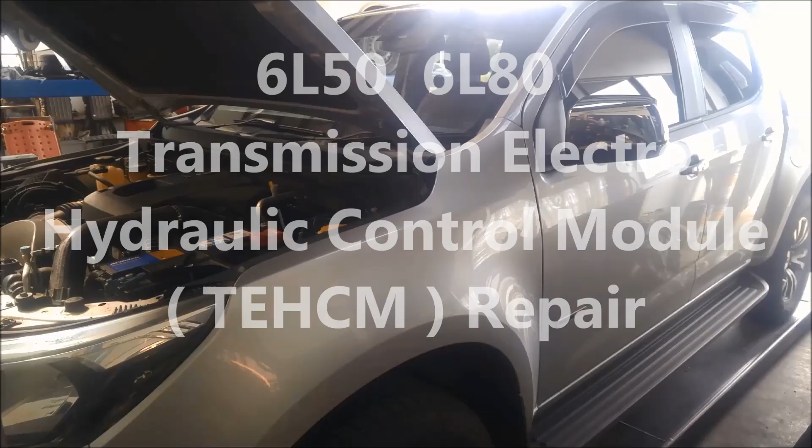G'day. Today we're doing a repair on a Holden Colorado 2.8 litre turbo diesel, and it's got the 6-speed transmission in it. 170,000 on it. And what's happening, the shift between third and fourth, there's a bit of a shudder. Also the torque converter clutch is pulsing, especially when it warms up. You'll see the tacho revs just moving up and down slightly.

So we've had the scan tool on there. We couldn't really get any transmission codes or engine codes out of it. So what we're suspecting is the transmission electro-hydraulic control module. What that means is there's a little plate on the valve body that has little switches on it,

and sometimes those switches get damaged, the rubber seals flatten out, lose pressure, or the little discs wear out, and they can get contaminated with fine metallic debris if they haven't been serviced for a while. This one, we believe, has never been serviced in 170,000 kilometres.

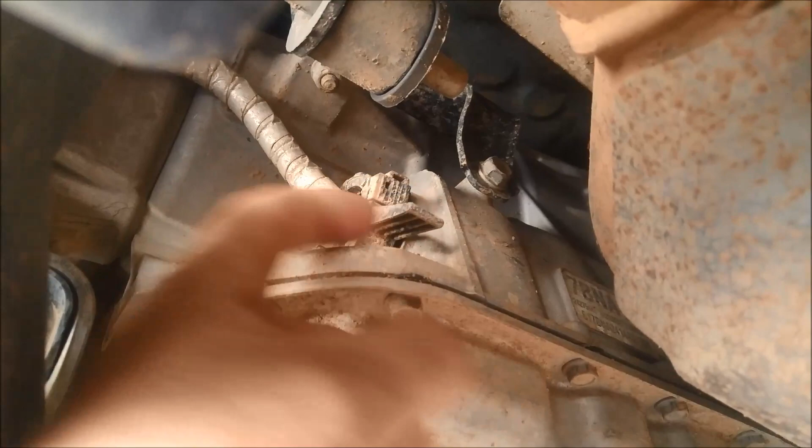Now the 6L50, 6L80, 6L45 as well, same family of transmission. They've got a little sleeve here that links the external electronics or cable to the mechatronics in the transmission. So we're going to remove all that. Make sure you clean that as best as you can, and also any other loose dirt around there. It'll just be a lot more pleasant to work on.

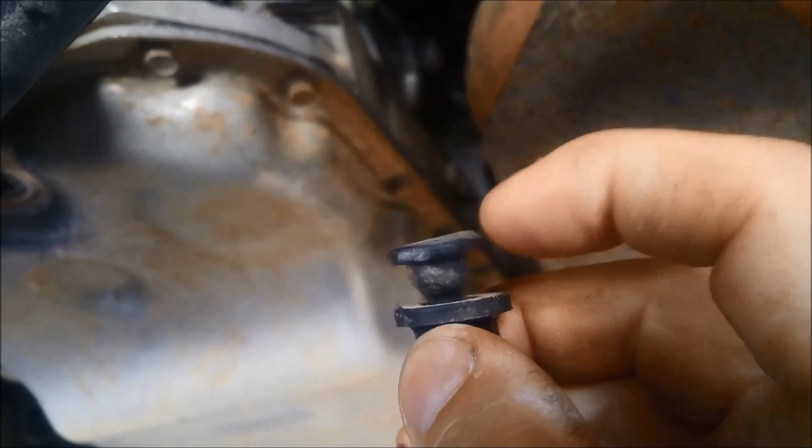Well, it's pretty dark in it. The filler plug is over here on the driver's side, or the right hand side of the transmission, and that's what it looks like. You just have to pop this little bit out. That's like a little locator pin, and then you'll be able to wriggle that seal out.

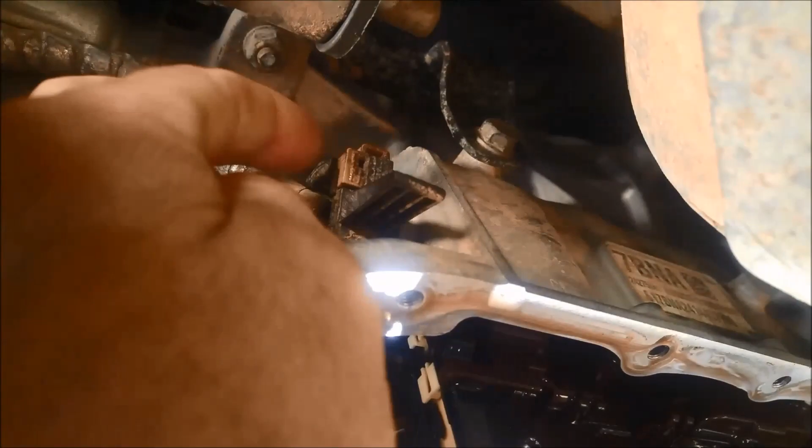Okay, we're going to remove the valve body. Now to start with, we've got to disconnect this cable, or this plug, from the transmission. There's a little locking pin there, you can see it, you've got to take that out. There we go. Take it right out, there it is. And then you press this little button there, and that's a fork that goes into that sleeve. You press that and just pull it down.

Sometimes I'm doing it with one hand, but you need to just push, so it's pushing up, so you can slide that out. Because it hasn't been removed for a while, it'll get stuck in there, and we don't have a lot of room here, as you can see. It's all confined on these.

So what I'm going to do is loosen this off first, and then the whole sleeve will come out with that plug. I'm going to replace that sleeve, but it'll come out with it. A little bit of tension on there if it won't come out easily, and it should just slide out like that. And now I can put my hand in there and just push that little tang, and that should pull that whole sleeve and everything out with the plug. It will manoeuvre out.

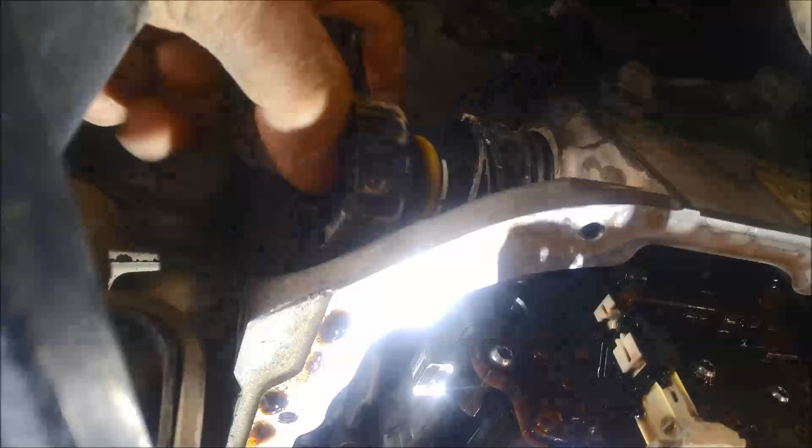You can see it's come out a little bit there. Take this plug out, and now that'll just slide out a lot easier. There we go. And now that valve body is clear of any plugs or anything. Good idea just to remove this detent spring where it locates on the different gear positions.

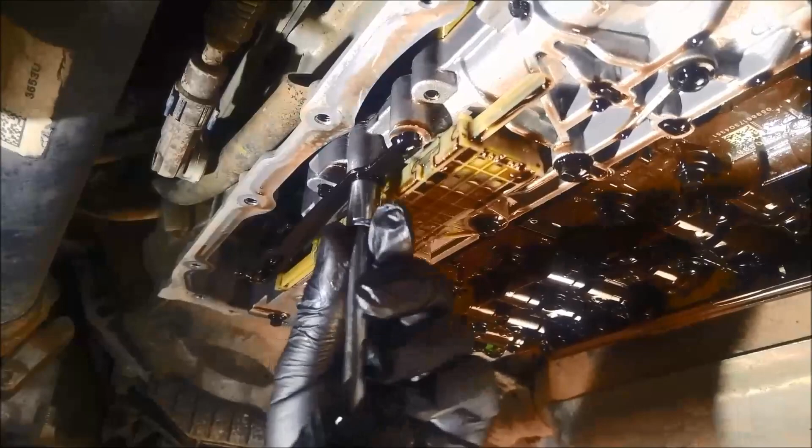And also, if you have a look at the heads on those bolts, a little bit hard to see, but it's an eTorx Plus socket, a special type of socket. That's it there. Just loosen the middle one all the way and just put it in a couple of threads, so when we take the rest of it out, the whole valve body doesn't drop down.

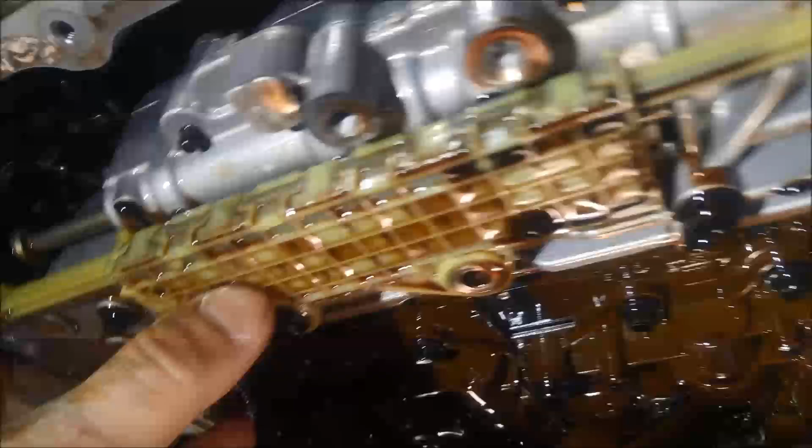Okay, now we've let it drain out a little bit. It's still got one bolt here holding it. You can see it's all flexible there. Just hold that up, take that off. And it'll be located on 2 dowel pins as well, so it might not drop out as easily. Yep, there we go.

You can see the little bridge seals, they're between the valve body and the case, and there's also one over here and one right up the front here.

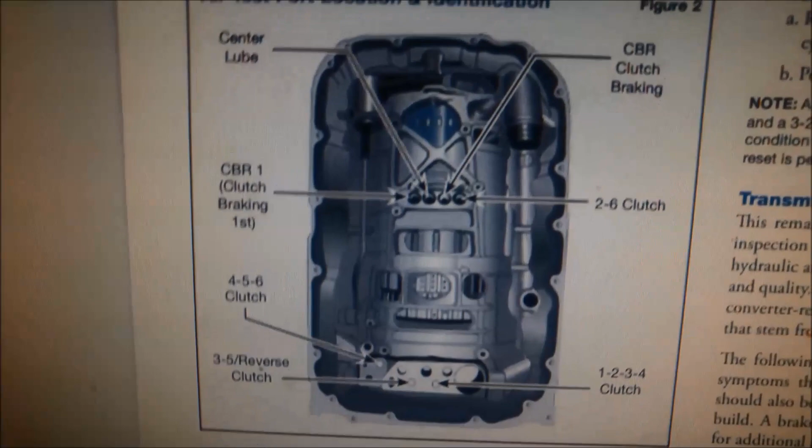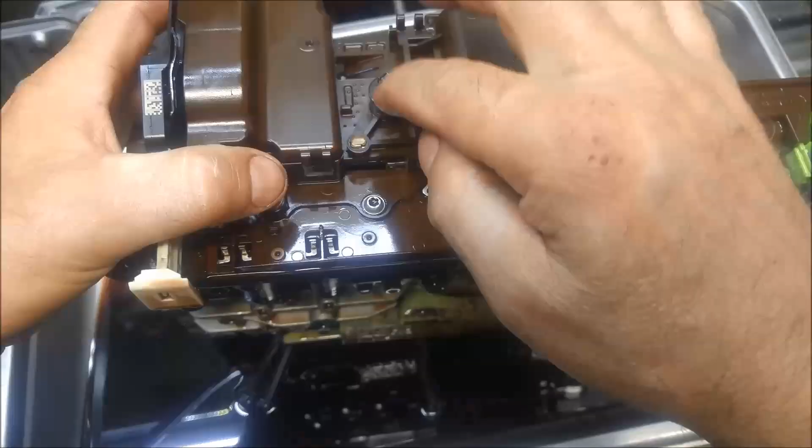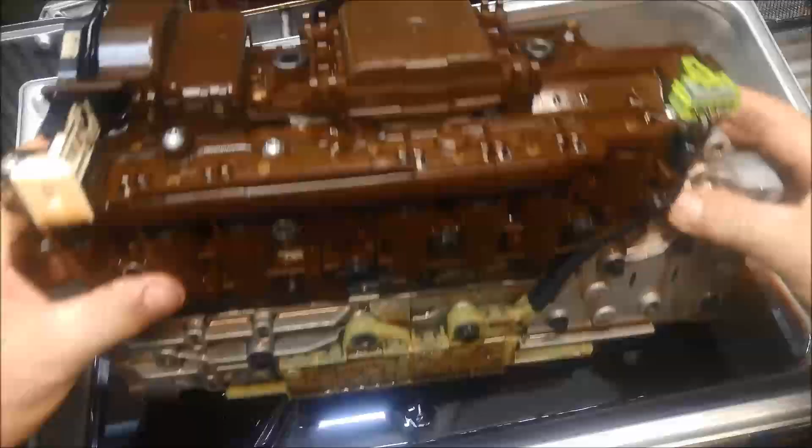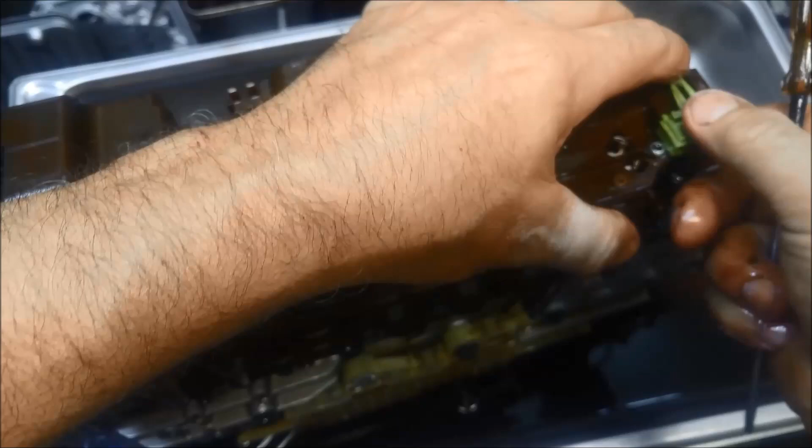We're going to take off these bolts here. All these. Disconnect the range sensor here. You need to take that little locking plug out first with a screwdriver, and then you press this, and that will help release it. You can see where the little lock is up here. And then we just press that, and that'll release that plug. Just jiggle it off gently. There we go.

This one here just slides over that little housing. And that can just sit there like that, or you can actually remove it. In another video, I show how I actually open these up, and you can flush all that fine metal out of there if you're having sport shift issues with the selector.

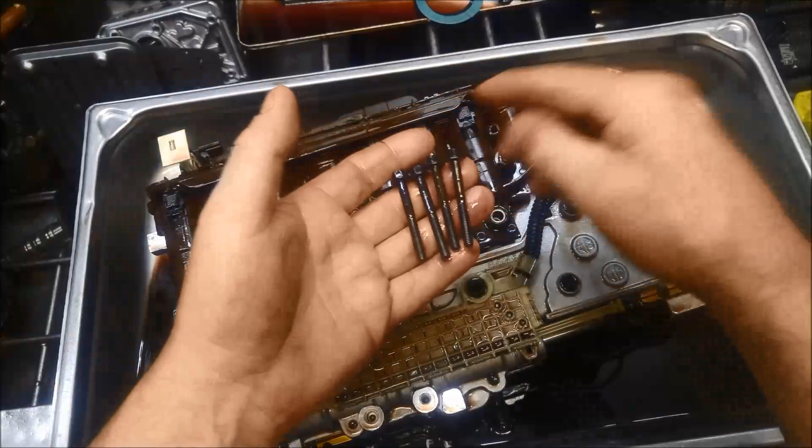When you're doing jobs like this, it's always good to compare the length of the bolts. Sometimes it is critical. On these it isn't, they're all the same. But it's critical to not put a longer or shorter bolt where it shouldn't be. Now this is just located on a couple of dowels. You can just slowly and gently remove that. There we go. Put it down gently.

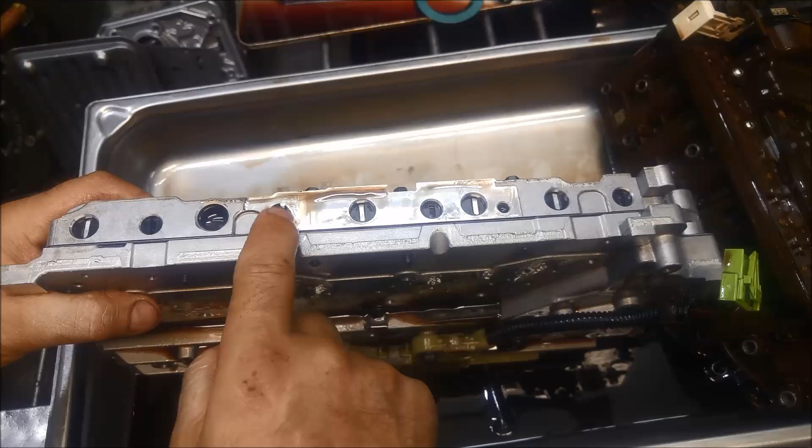You can already see all that fine metal accumulated there where those little pressure switches are. If you have a look here, we've got a little dowel guide, and when you're putting it on, you need to actually slide it onto that first and then onto here. You can't just push it on from this angle, it has to come on that way.

And there we go. You can see all the little pressure switches there, and you can see that they are contaminated. These seals flatten out as well. These filters can get blocked up as well. But what we're going to do is take these seals out here, because these pressure switches are critical in the operation of the transmission.

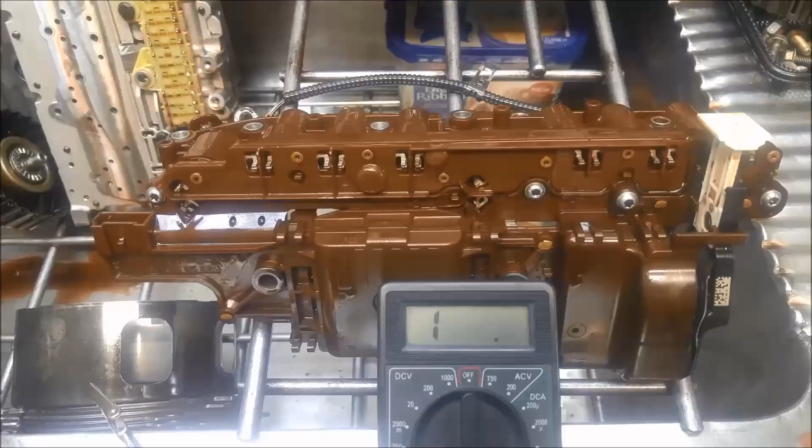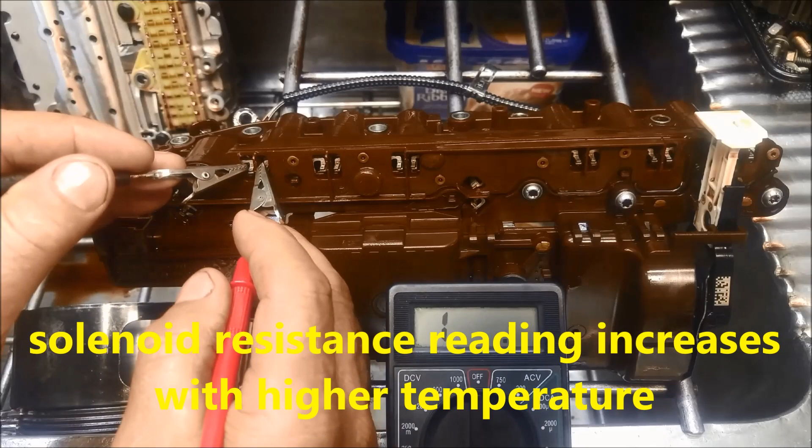Now before we go ahead and do any work on it, it's a good idea to measure the resistances of the solenoids there. Today it's about 28 degrees here. That one, what have we got, 24.8. And these ones all along here should be about 6 ohms. Got 6.2, which is alright. 6.1 or 6. 6.

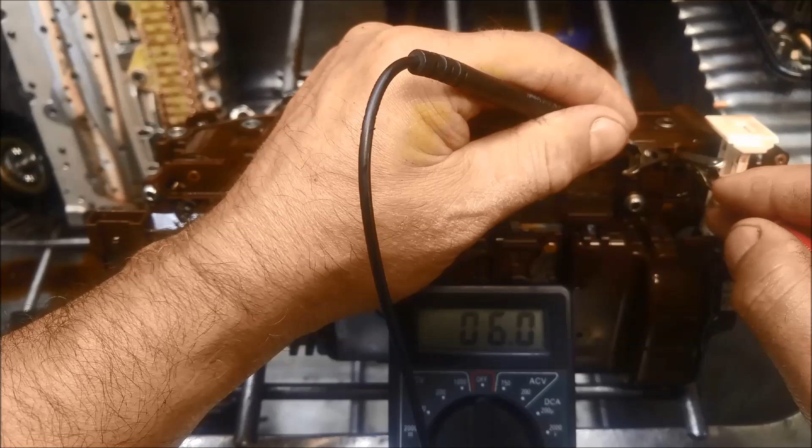That one's the same as this one over here. 6.2. Oh. 6. And there's one on the other side here.

Alright, now bench testing them cold or at room temperature is just a rough guide. Ideally you'd want to have this warmed up to about 60-70 degrees and do the same test. Quite often the solenoids will fail under heat. With this particular vehicle, the issue was jumping in and out of gear, or the torque converter clutch was cycling, applying and disengaging constantly when it was warm, and there was also that harsh shift as well.

You want to always be careful of that little fork there, that you don't knock it off or get anything damaged. And now we're going to pop out all these seals here. I can actually feel that they're quite hard. Now I've got this well-worked screwdriver, it hasn't got any sharp edges on it. This is the one that I do a lot of work with.

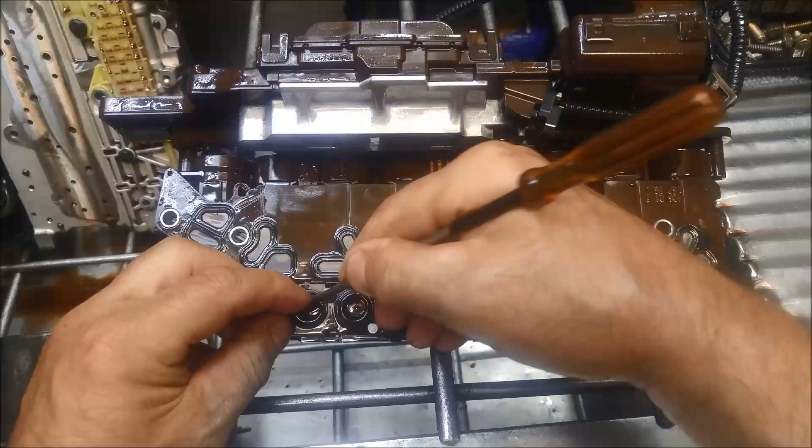And we just basically push that rubber in. It sort of looks like a top hat. And the bottom of that seal will be caught inside a little groove. There we go. You just have to work it slowly around until that seal pops out. Sometimes it will get stuck in there. There we go. And that's what it looks like. You can see that goes in under a step there.

And now I've got an old dentist pick, which is pretty handy to pull these out. I'm just going to pull out that little pressure disc there. Now I've got to get in because it's actually underneath that groove. So I've got to get in under the groove and flick it out. There we go.

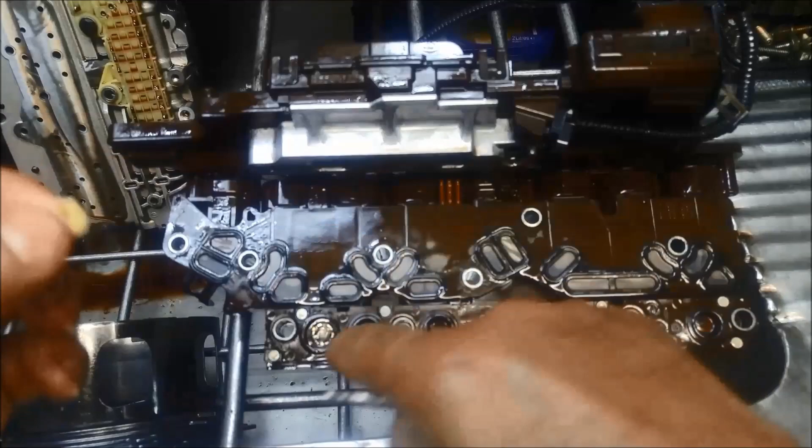A little bit stuck. Oh, there we go. Flew out. And we take out that little piece as well, because we're going to wash that and blow it out. We don't want to lose that. And you can see the flat bit goes up towards the disc. It's actually damaged a little bit, and it has taken a funny shape there from working all that time.

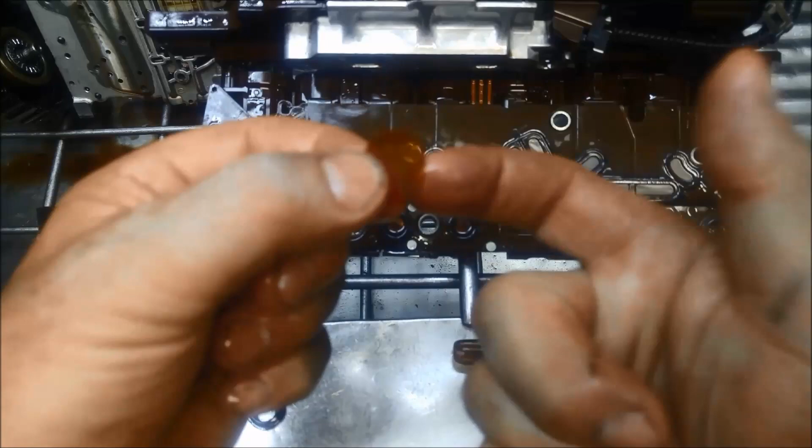And what happens, that fine material or debris gets stuck under there and then earths out the contact, or even doesn't allow that little pressure disc to move up and down. That's one thing. And another thing is these seals. They flatten out or they harden, and then they can't seal properly. Especially when they warm up, they'll end up leaking pressure there.

Take all the rubbers out first. I might need to get a pointier tool there just to get under that, so I always try and not damage these discs. Sometimes you can just wash it and reuse it if it's still got its flat shape. If it hasn't, then it's better to replace it. Doesn't want to come out.

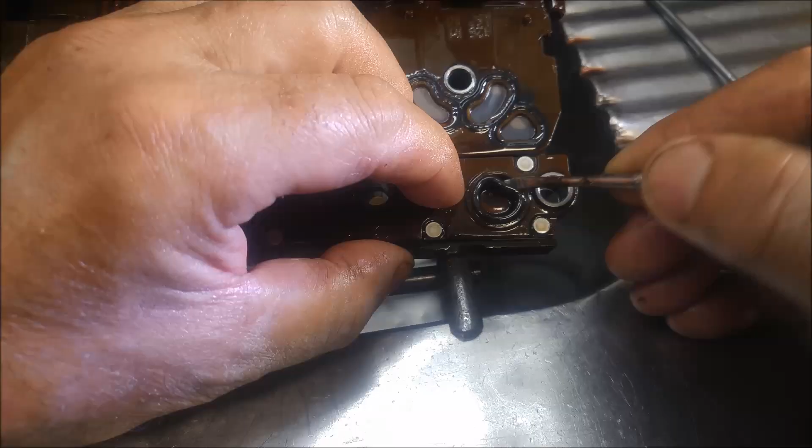There we go. That little tool there. It just sits under that. And you actually need to bend that little disc to be able to get it out. But be careful you don't damage those little contacts in there when you're doing that. So do be gentle. And it is a little bit fiddly. Come out.

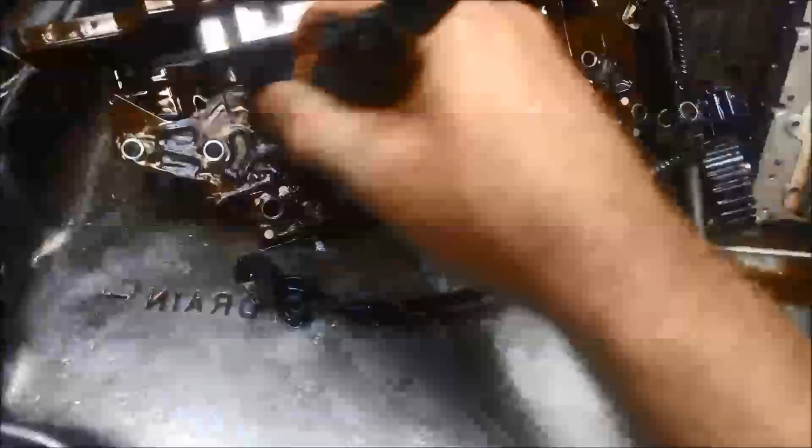I've just got some clean solvent there now. I'll just give it a bit of a squirt in there. Make sure you check all those filters that they haven't got a tear in them or anything like that. And this whole mechatronic, TEHCM they call it, is quite an expensive unit. That's why we're trying to do this repair on it. A lot cheaper to repair it.

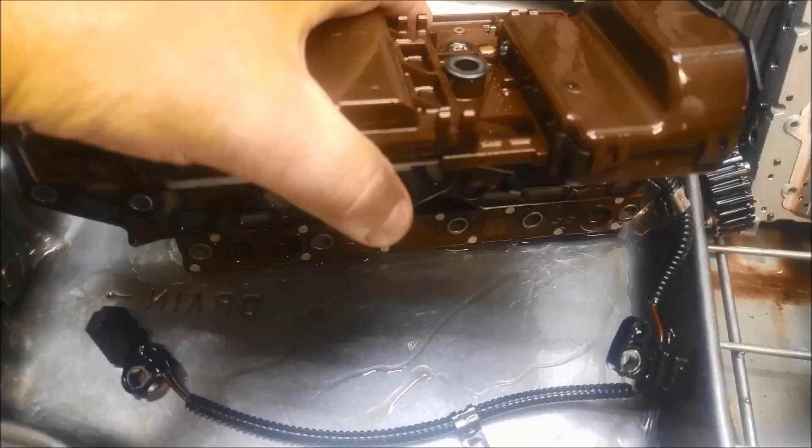Now I've got about 50 psi pressure there. We're just going to blow it. I'll squirt with some solvent. Air on its own is not going to clean it out. You need some sort of carrier, which is the liquid, to clean it out properly. So you might have to do that a few times.

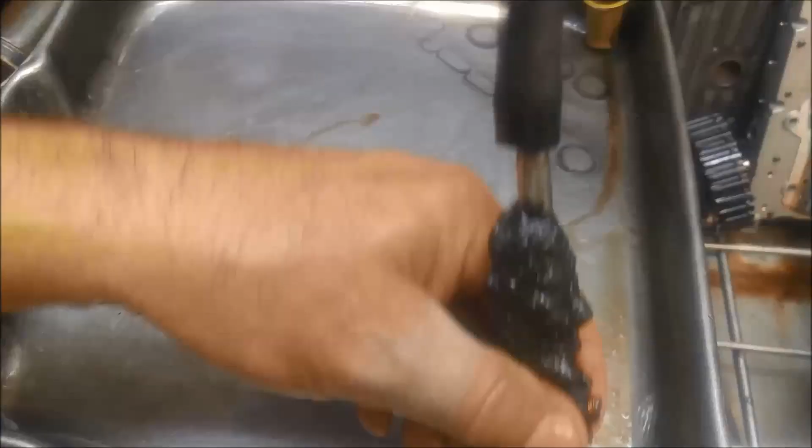This tray was clean when I started. I've got magnets under the tray there. I like to see how much muck I've cleaned out. And there even are a few little larger flecks there. And what that actually is, that's fine metallic debris. And what happens, that gets magnetized in the solenoid, and that's what actually creates a lot of the problems in these. It just moves around in there. It can't demagnetize itself or flush itself out.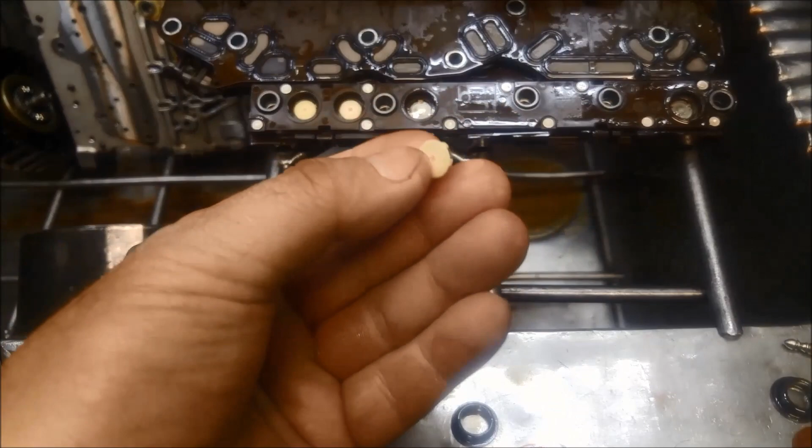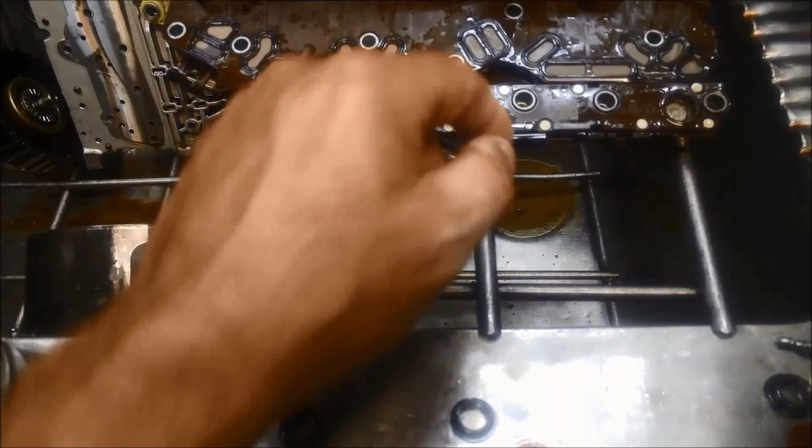Wash all these and put them all back in their respective spots. And when you're putting it in, make sure you haven't got those teeth facing up. They've got to be facing down, and they'll locate around those three little contacts. Like your last one. Make sure they're sitting in there properly. Oh, there we go. Sometimes gravity is your friend.

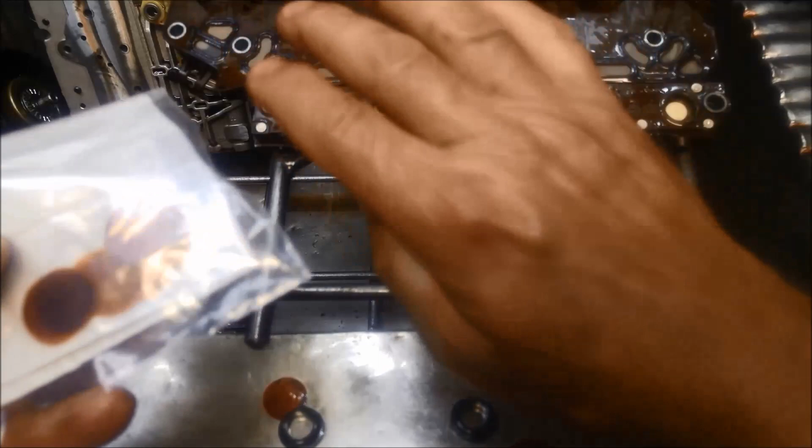Now we reach into our kit, and we've got the new discs. And when you're putting these in, you actually fold them and you have to tuck it in under that. It's hard to see there, but there is a little groove there where that rubber seal sits on, and this has to sit in that groove as well. You can see that's a new disc, and you want to just bend it like that as you're pushing it in, and it'll help get it started in that groove.

And I've pushed it in under there, and now you've got to just work it. And in the kit you have this little tool, and that helps you push it in. You've got the heel and the toe, and you just use that to slowly work its way in there and tuck it in under that groove. And you try and not do it too forcefully, or you'll damage that little disc. You'll put a kink in it.

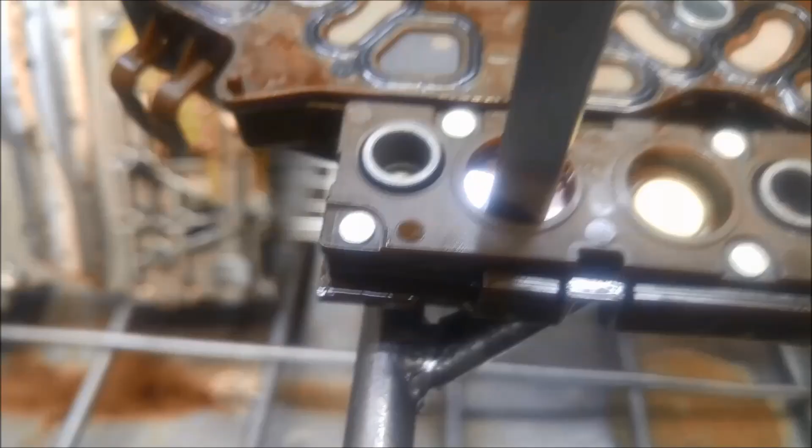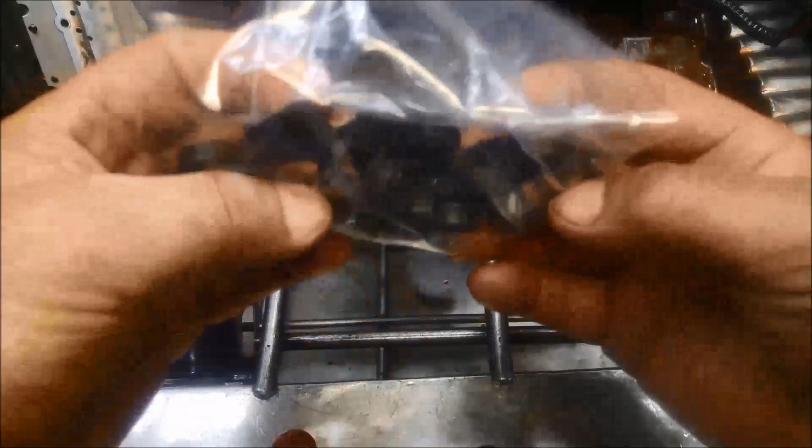There we go. Just go right around that groove. And that's gone in quite well. And now we need a rubber seal. You can see there's quite a few in the kit. That's what they look like. And they're a lot more rubbery than those. And probably, if you measure it, it's probably a little bit higher too. So the old one's probably flattened out a bit.

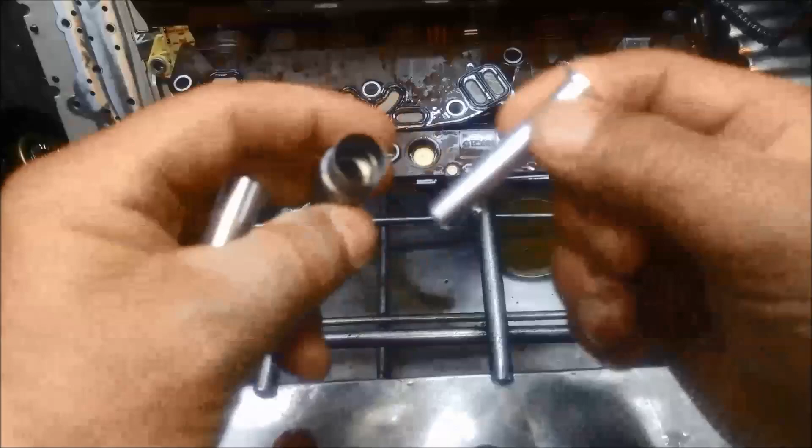Now in the kit, you have this little tool. And you'll notice it's got like a little flange there, a wider bit. That goes in there like that. And because the seal is going in, this little step here goes into that groove. You need to push that in here, like so. Work it into that tool.

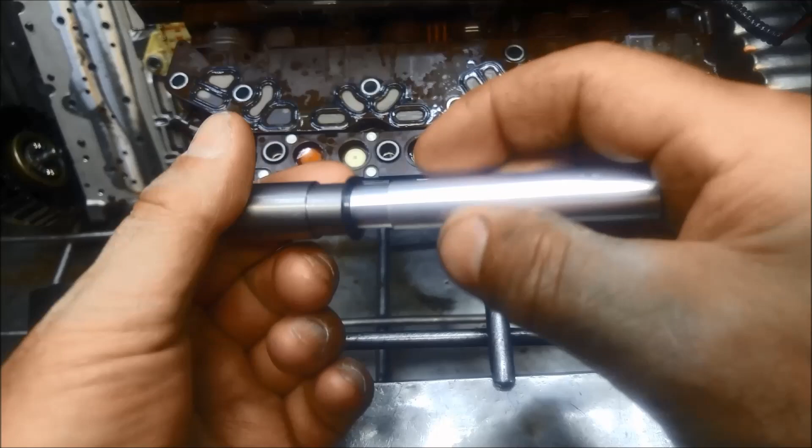Then we get this tool. You can see it's got a, won't focus, it's too shiny. It's got like a little step there, and that helps push that seal into the tool. Just work it in there, otherwise sometimes you can end up cutting it, or even get it started like that. And that should just push in there. There we go.

You can see that. Hopefully it hasn't cut it. I don't think it has. You'd see a little split or a nick out of it. And now what we do, we place that into the switch there. Press it down firmly, try and get it pretty central.

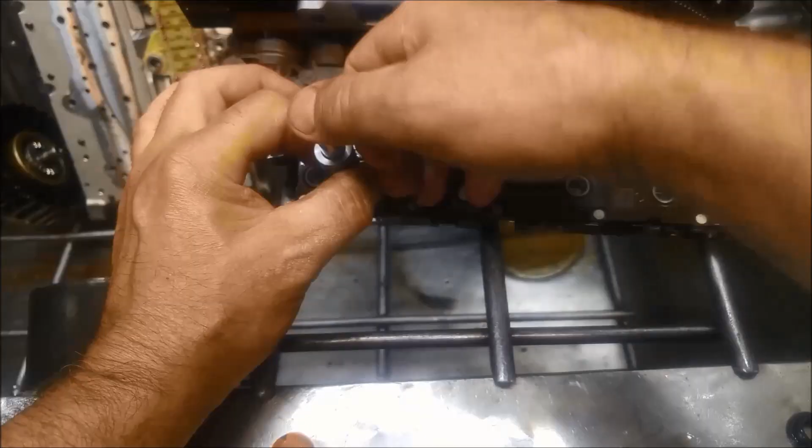And then we're going to push this plunger that's going to push that rubber back out. And hopefully that step will land in that groove. Just turn it a little bit just so it seats properly. And then I'm just going to support that and slowly push that plunger in. Now it's fairly uneven, and you want to make sure, like I mentioned earlier, you don't break that fork when you're putting that in. There we go, it's in.

It's not in properly. One thing I probably forgot was to put a little bit of oil on there. That would have made it slide through the tool a lot better. Now we just give that a bit of a wriggle. Just make sure it's seated properly in that groove. And that looks good. Push the rubber right around. Just make sure that that little flange on that rubber has gone into that groove. And there we go. Now I've got 3 more to go. And the last one.

It's gone into the groove, and then I just push on that little pointy bit there that hasn't gone in, and just slowly push the corners in, and then it won't get damaged. It should just pop in by itself. And you don't just force it in, otherwise you can damage that little disc. There we go. And we just run right around, make sure it's seated evenly all the way. Visually have an inspection of it, make sure you haven't got a kink or anything in it.

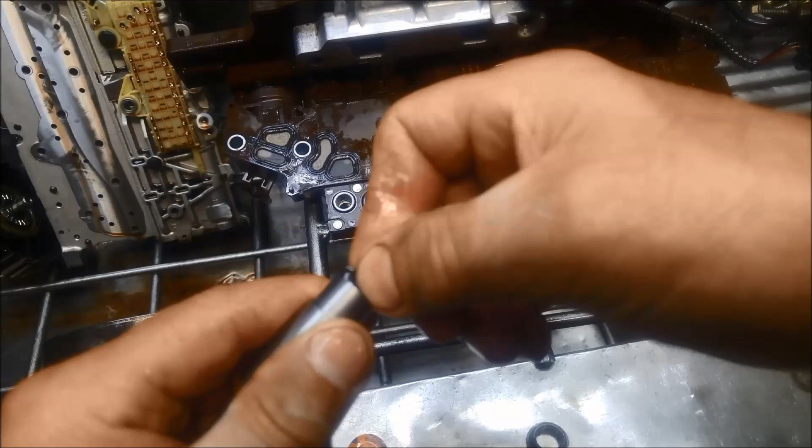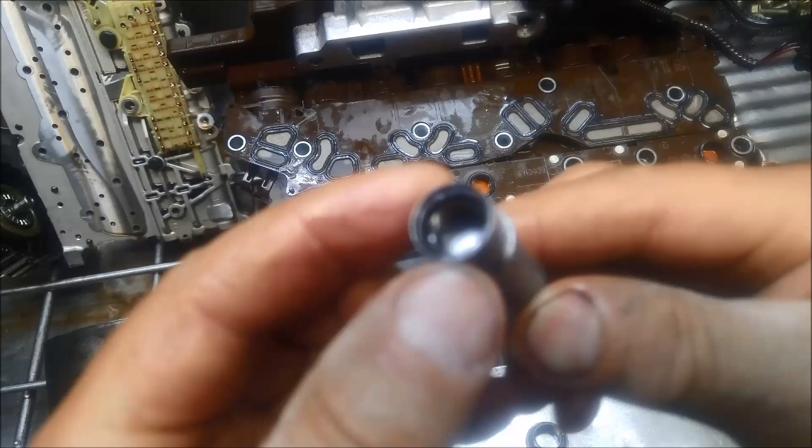And I've got those 2 rubbers in, and I've got the last one there. A little bit of oil on there. It's all in nicely there. Just rotate that around, make sure it'll go in. We just push it. As we're pushing the plunger in, we're pulling the other sleeve, the outer sleeve up. And there we go. Whoop. And you just have to double check, make sure it's gone into that groove.

There we go. You can see all the little plates are new. The rubber's all gone in nicely there. Fully reconditioned. Ready to rock and roll again.

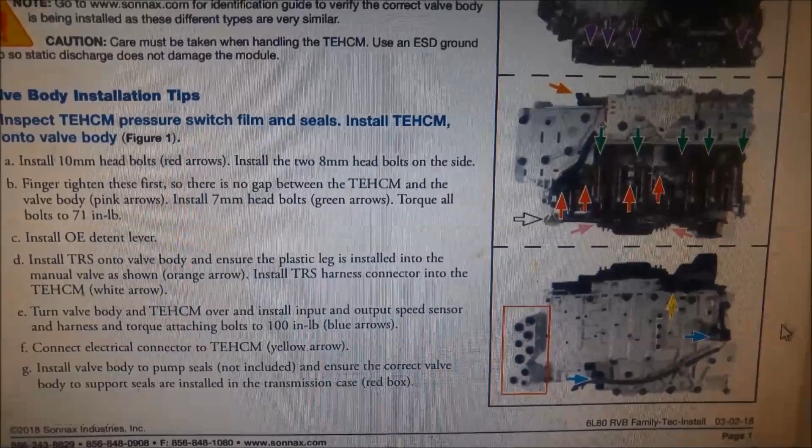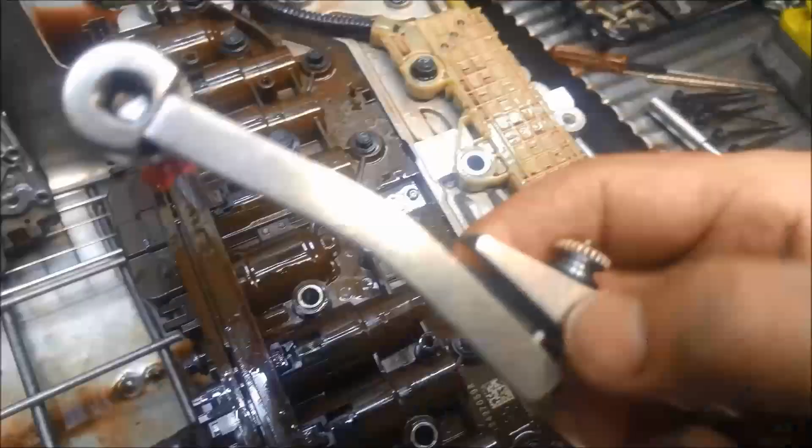Now here I am on the Sonnax website, and it actually explains to you how to tighten the EHCM or TEHCM back on there, and gives you the torque settings as well. Now if you couldn't follow that explanation, basically what it means is you put all the bolts in just loose. We actually bring them up to almost where they're tightening, and these two bolts that are pushing the whole TEHCM that way, you do them up first, and then by just applying a little bit of pressure you do the rest of the bolts up. We tighten them all up to 70 inch-pound or 8 Newton metre.

All torqued up. Now don't forget to put in the range sensor plug. Get it around like there, and that just pushes in. Just stops that cable from fluttering around. Don't forget to put the little locking pin in. That one. Click, click. Your speed sensors, put them back on.

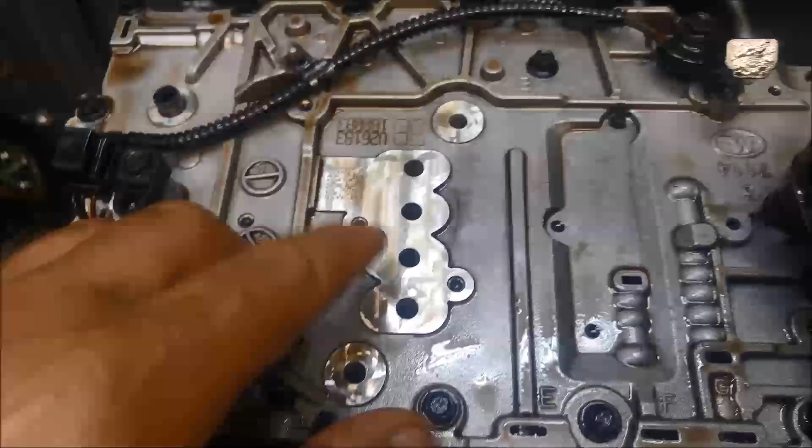We are going to replace the seals there. You have a seal kit. You can see they're probably flattened out a little bit. If you're prying them off, just be careful you don't wreck the surface. And there's one on the case there, and they come in a kit. Like that.

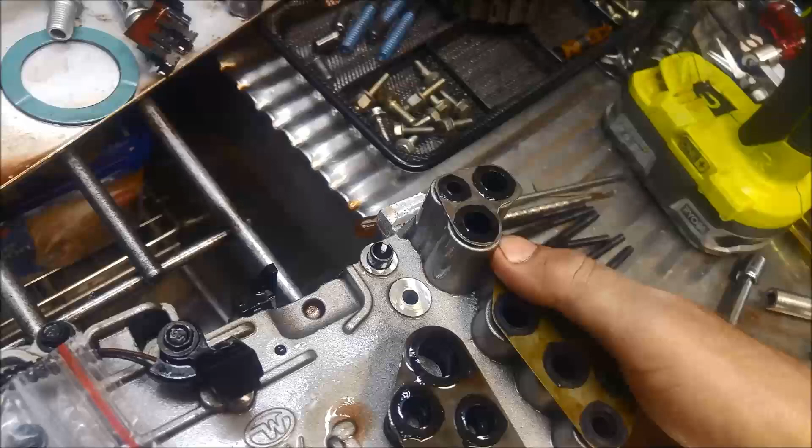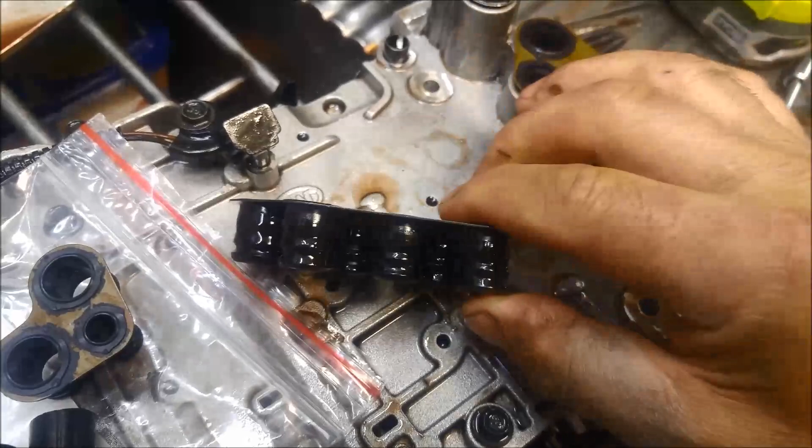You can see one corner's got a bigger hole over here, and you just push that in evenly and gently till it crushes down. When you do that up to the case, it'll actually press down on that seal and seal better. It'll actually spread that little tube out. And that one.

I can feel it's much more pliable than the other one, so it's probably going to seal a lot better. The last one, that one there, sits up in the case here. Okay. And that valve body is now ready to be put back in. When you're putting it in, make sure you align that little range sensor there.

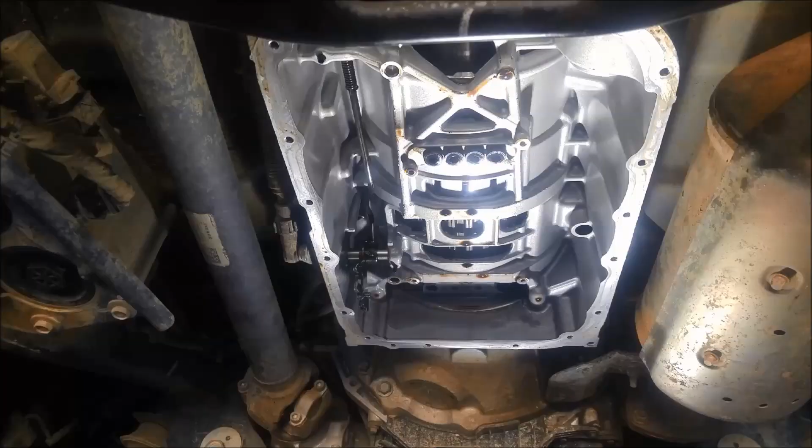And from memory, I did actually record what all these little pressure ports are there. If you choose to do an air pressure test on the clutch packs, just be aware that there's going to be a lot of oil spitting back at you when you do that. And you'll notice on the top of the valve body you have two little dowel pins that locate as well. Line it up. Yep.

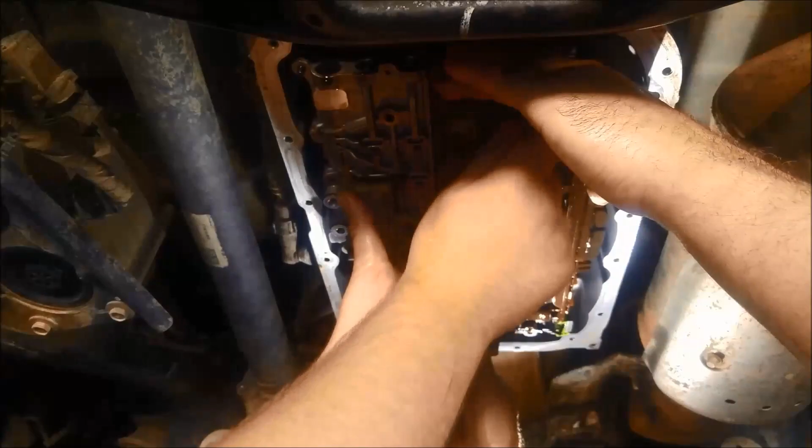We tighten those up to 100 inch-pound, or that's probably about 11 Newton metre. And it will go up pretty hard because those seals are actually getting squashed up against there, so they seal.

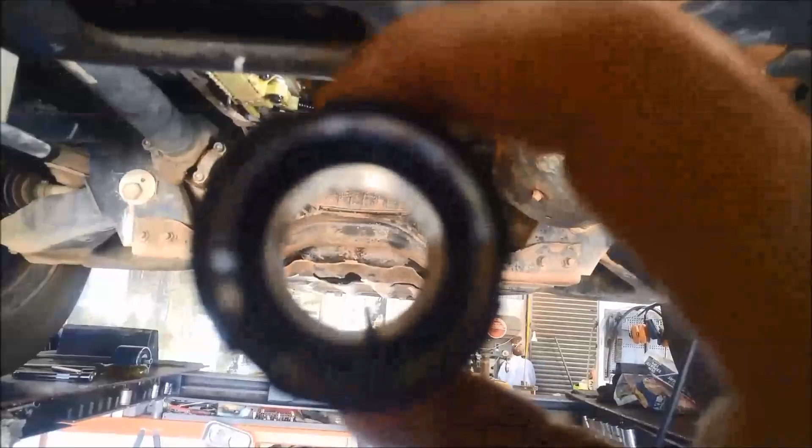Now we need to put the case connector in. There's the old one there and the new one. Smear a bit of oil on it, and if you see there's a little pin there, and that pushes in at about 5:30. As you're pushing the case connector in, you've got to actually push it fairly hard, and then we'll just slide up that fork and that holds it from popping out. Do not force this, it should just slide in nice and easily.

Now what happens, the three rubber seals, the tension of the rubber is actually trying to push that sleeve out. So you've got to really push hard. I've actually just got it started, but just to show you how easily that clip should go in, it should just slide in like that. And that just clips in like that. The plug there, we're just going to put a bit of WD-40 in there.

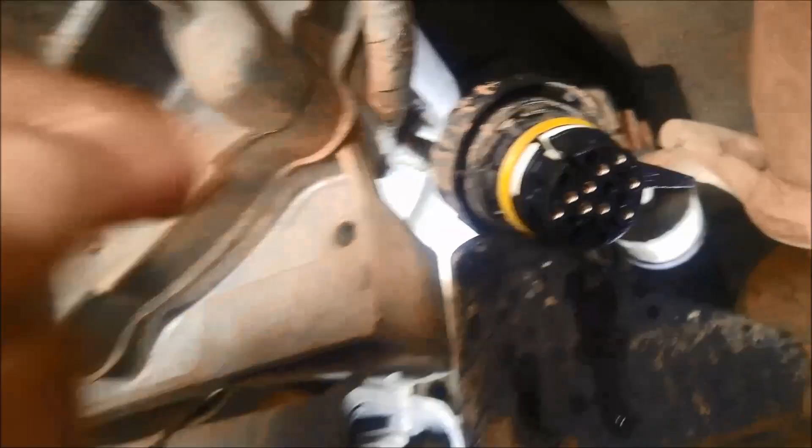And the same thing, as you're pushing that in, you got to remember that little slot's at about 5:30, and just keep tension on it, and as you wind it down, that'll pull it in. It's just in, and then I just push, keep a tension on it, and pull that down until you hear the click. There we go, that's locked in.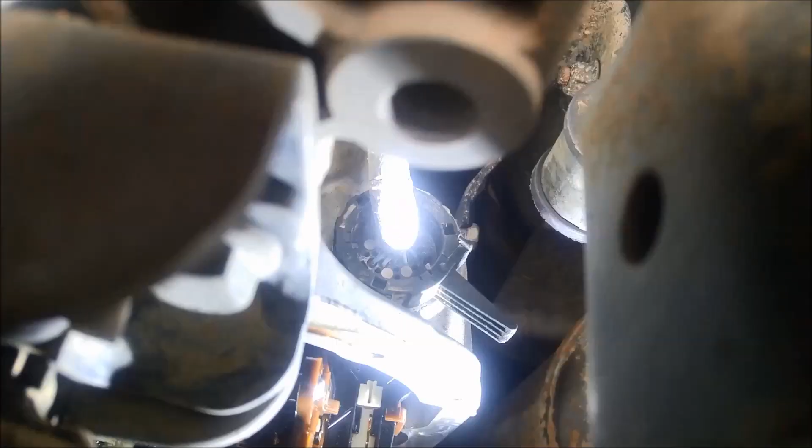And if it had the little locking pin, you can put that back in as well. You can see it's got like a little T. You just line up that T. And there we go, it's in place. Now's a good time to check your work. And if you notice here, that's lined up with that pin.

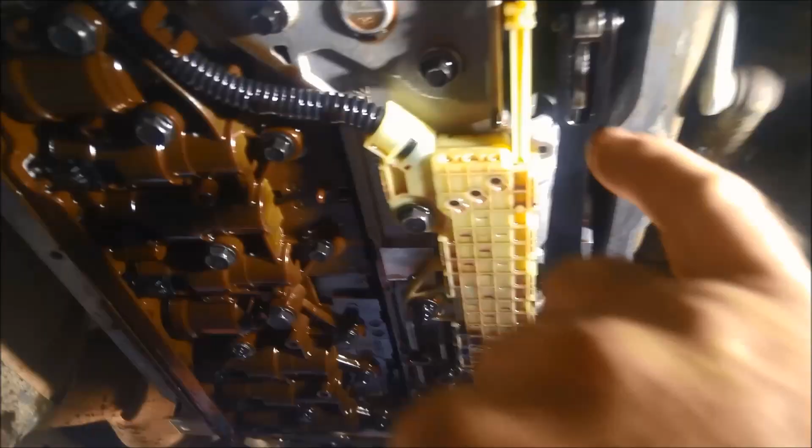But you'll notice we haven't put the detent spring back in. Always try and get that little roller there in the middle of those teeth. It'll wear a lot better. Double check your work, check your plug, everything's been tensioned up, little forks up, plugs in.

We're at the stage now where we can put the filter in. The Colorados have a slightly different filter to the Crewmans and the Commodores, so make sure you've got the correct filter. You can see the magnet's got a lot of rubbish on there. That would have been circulating right through the transmission.

And what we like to do is when we clean that, we'll leave it up on that little bump there, just so that magnet can work top and bottom. And also, because the oil is so dark in this one and there's so much fine metallic debris, we'll add a neodymium magnet to it as well.

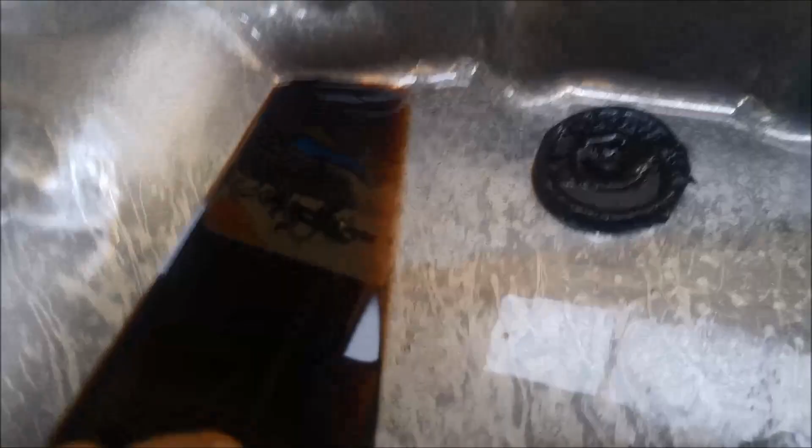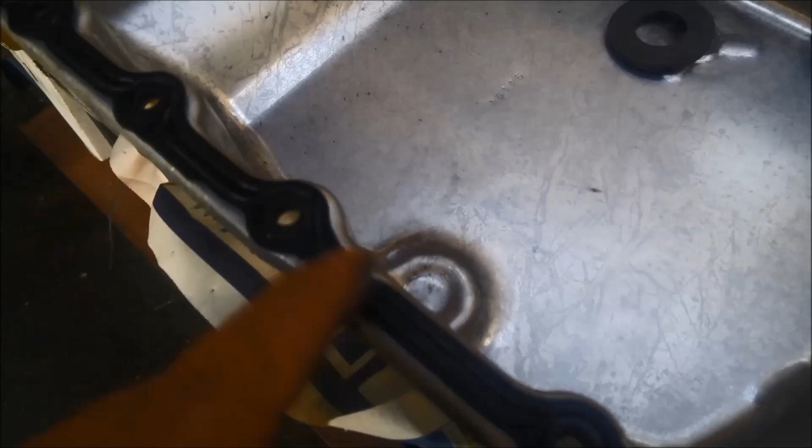Pan's nice and clean. We've got the magnet up on the ridge. Just make sure it doesn't hit anything or is in the way of anything or too close to the solenoids. And you can see we're going to put a neodymium magnet there up on its edge as well. The pan seal is rubber. You can reuse them, but because it's rubber, it can flatten out as well, so it's up to you. We're going to replace this one.

And because the transmission filling point is right above the exhaust, I'm going to pre-fill this, I'll put a few litres in there. I've pre-filled it with the Tritech low viscosity full synthetic fluid, 3 litres will fit in the pan. Don't put any more in. Don't fill it right up, because when you put the filter and the valve body in, it'll take up that space and it'll overflow the sides there.

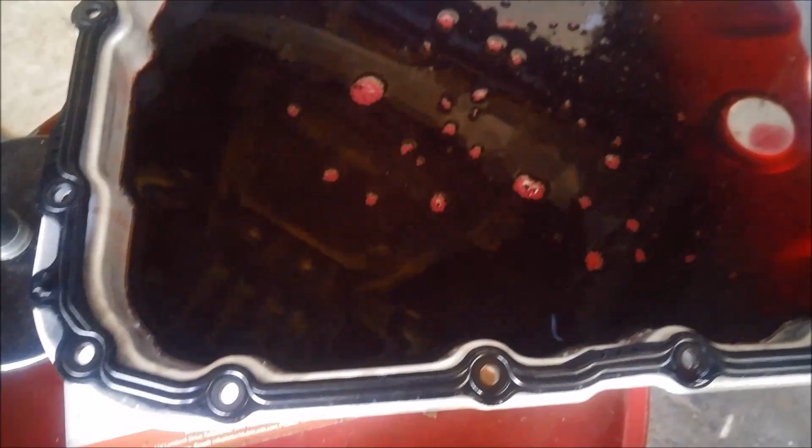Filter, like I mentioned earlier, make sure you've got the right one. The Colorados have a little bit longer space on them. And now we can put the pan back on. A little bit awkward to put on, you can see a little bit spilt over. And now we're just going to put all the bolts in, and then we can do it up. All the bolts are in.

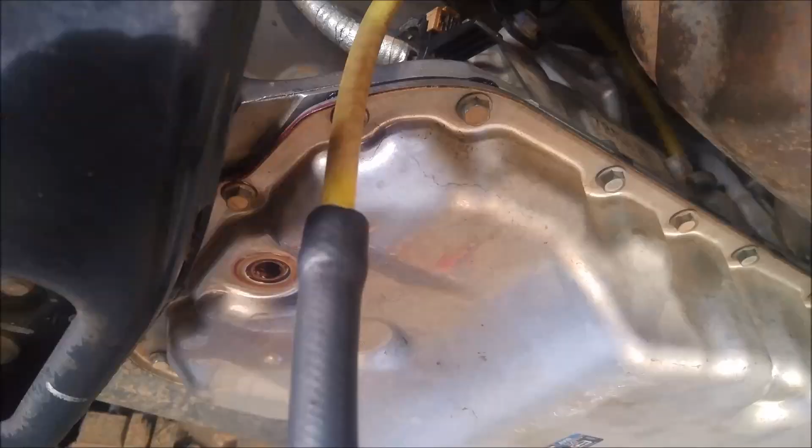And now we just start it up for a few seconds, just to pump that oil into the transmission, because you're not going to be able to put the whole amount in there. Okay, so we just briefly start it. And that's long enough. We can put another 3 litres of fluid in. We can keep the motor running, and we've got to warm this up to 30 degrees. We've got about 7 litres in there, and we can keep the motor running now.

Select through the gears. Put another litre in. You know, when it warms up, it'll start coming out. It's still under 30 degrees. Got about 7 litres in there now, and we're just going to try and warm it up till it gets to 30 degrees. It should be just trickling out.

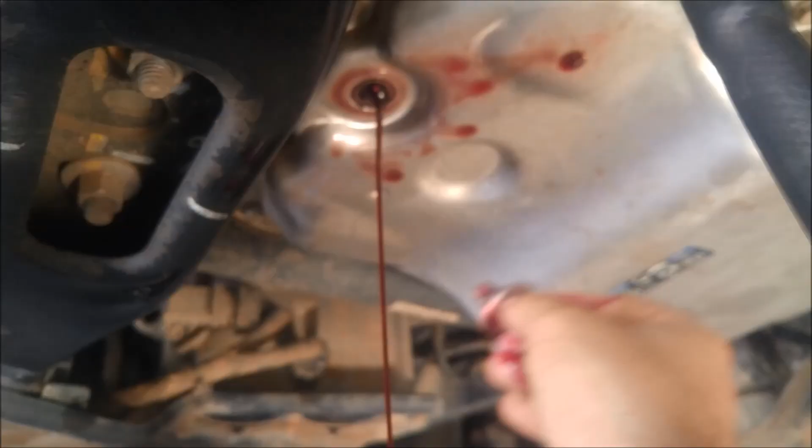So we've got it to 30 degrees, a little bit over. We just want a thin stream coming out of there. We've got it to 31 degrees. And we just want a thin stream like that.

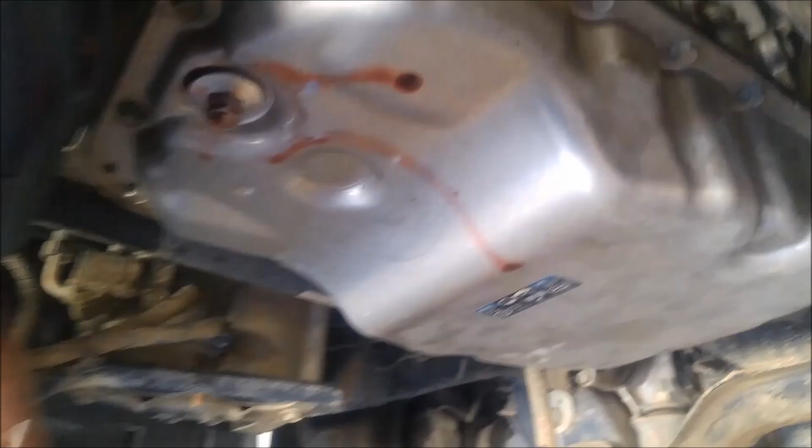Don't forget to tighten that up and push the little locking pin on the filler there. Wipe up any oil. Double check your work. Make sure you've got your locking pin there on that. Some vehicles come without it. If it's there, it's a good idea to have it.

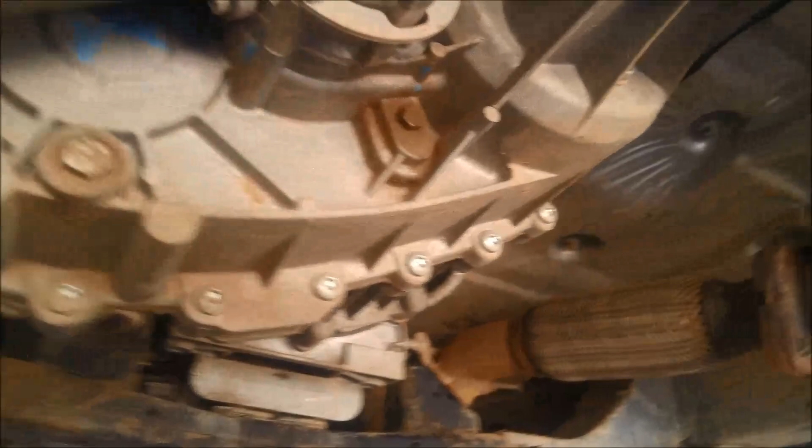While you've got it up, good idea to just check your transfer case fluid level, check your unis, check your rear diff, check for anything out of the ordinary, any rubbers, exhaust leaks, that sort of thing. There we go. I'll just take this for a run now and we'll see how it's behaving on the 3/4 shift.

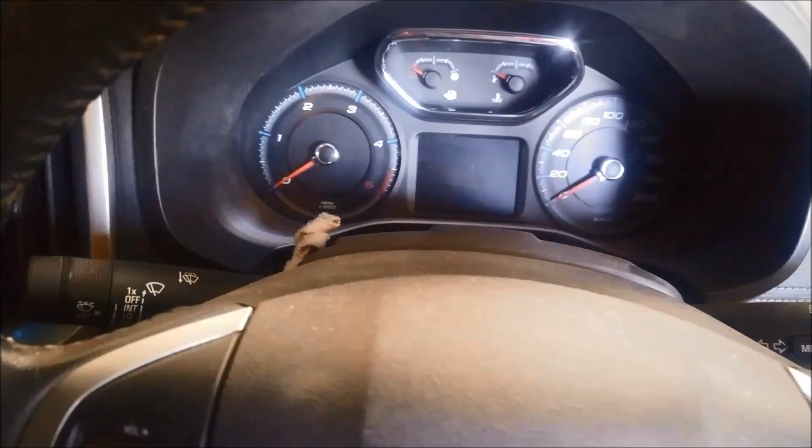Just back from a road test. I probably didn't get it hot enough to fully test the torque converter clutch for cycling, but the 3/4 shift is definitely changing normally now. There's no shudder. It was doing a shudder every time. It probably needs warming up, going for a longer run to see if that torque converter clutch solenoid is still cycling.

If that problem's still there, then you probably need to look at pulling out the transmission and going through it. The clutch plates are probably glazed or something along those lines. The oil in this one was very dark, and the seals were hardened and some of them were flattened out. So more than likely the other seals are in a similar sort of condition. Anyway, I hope that's helped.